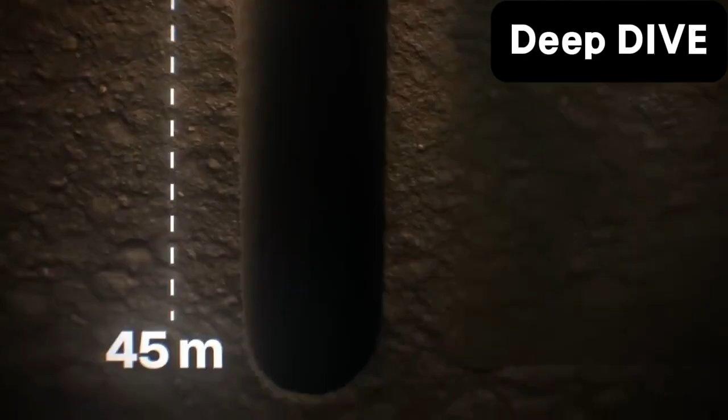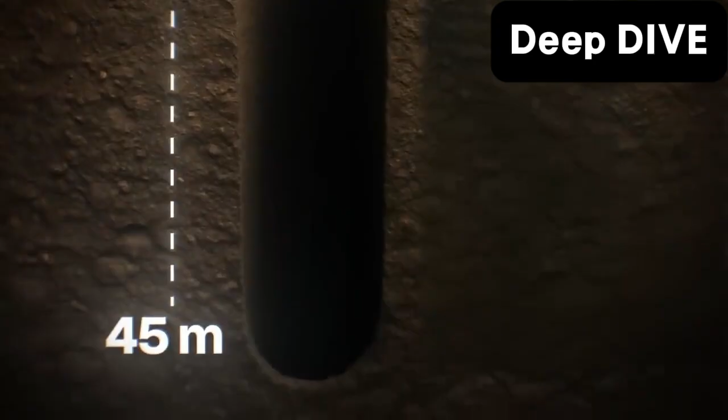It's evident that if Dubai wants to claim the title of the deepest pool, they will need to increase its depth from 45 meters to 60 meters. However, this task is much more challenging than it sounds. Experts calculated that if the pool's depth is increased to 60 meters, the groundwater pressure would easily push up.

When we mention them, the first name that comes to mind is Dubai, which boasts 425 Guinness World Records and is the leading city in the Middle East. It feels as though this position is something that the rulers of Dubai are unwilling to relinquish under any circumstances.

An additional entry was added to this World Records library at the request of Dubai's Prince Sheikh Hamdan bin Mohammed bin Rashid Al Maktoum. Today, it is known as Deep Dive Dubai. It is not just a pool, rather it is a bizarre and extraordinary world. This pool has a theme of a submerged city where divers get to experience something unique.

Something unique, which was tough to even consider. In order to maintain the cleanliness of the pool water, a system has been created with NASA's assistance that purifies 14 million liters every 6 hours. Regardless of whether the outside temperature is 50 degrees Celsius or 20 degrees, the pool water is consistently kept at 30 degrees for divers' comfort.

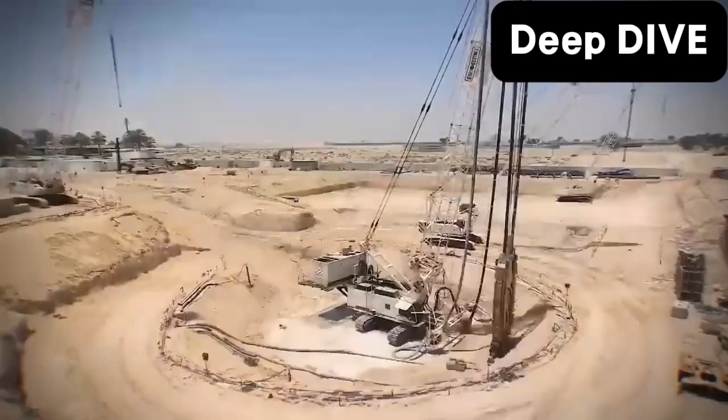We are more fascinated by the construction techniques of this deep dive than its features, as the engineering community thinks that this deepest pool in Dubai is an engineering masterpiece. During the construction of the deep dive in Dubai, engineers faced various challenges. Let's take a look at these without wasting any time.

The first hurdle was in planning and design. Sheikh Hamdan, the Crown Prince, desired a design that showcased the cultural values of Dubai. Before oil and tourism, Dubai sought to show its cultural values through pearl design, with the world's deepest diving pool inside it, with global architects and engineers involved. The simplest method proposed was to erect a sturdy building 45 meters tall and then fill it with water. This idea had a flaw.

The pool could be 45 meters deep, but to break a world record, it must not be above ground, but it should be built below. Secondly, Dubai is a very hot city. If the pool is constructed above ground in a building, the heat of the environment will affect the pool.

The Crown Prince of Dubai desired a pool that would not just be designed uniquely, but also have a depth that would be the talk of the world. Consequently, it was determined that the world's deepest diving pool would be dug underground. A shaft would be created in the ground. It will be a vertical shaft, not horizontal.

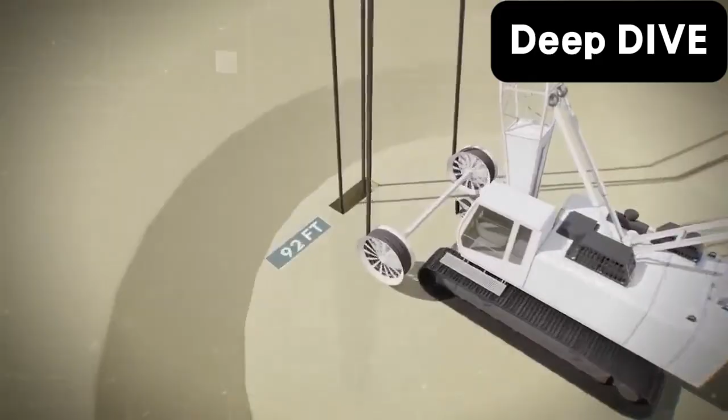This marked the beginning of a new challenge, which was excavation. The engineering team's challenge was to dig a shaft that would be 92 feet wide and 147 feet deep. Not only did they need to excavate this shaft, but they also had to construct a wall around it to prevent collapse. In engineering terms, this wall is called a diaphragm wall.

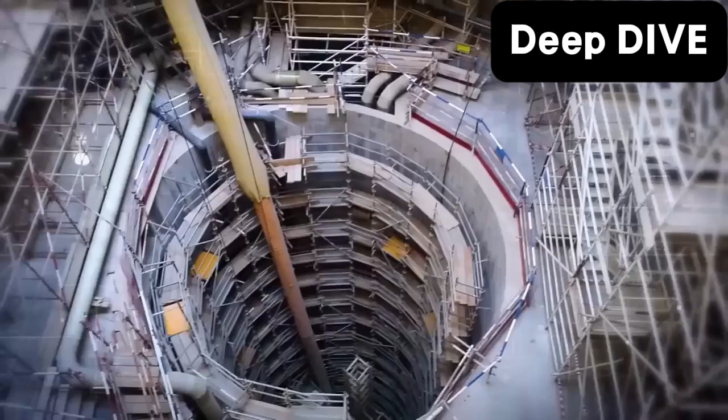To accomplish this task, a specific excavator was procured, which dug down to a depth of 147 feet, achieving a width comparable to that of a pillar. After that, a steel cage was placed inside and concrete was filled in to complete the structure. And then, in the same manner, the entire diaphragm wall was constructed in small chunks. This entire process took more than 2 months to complete.

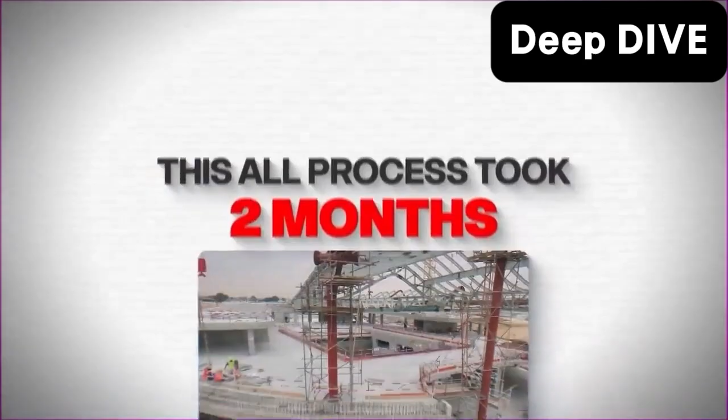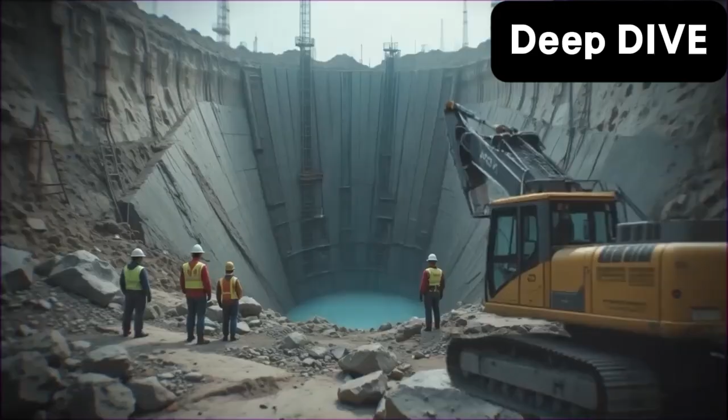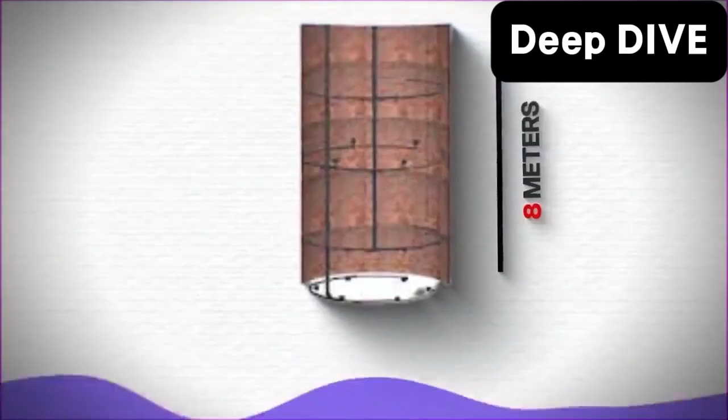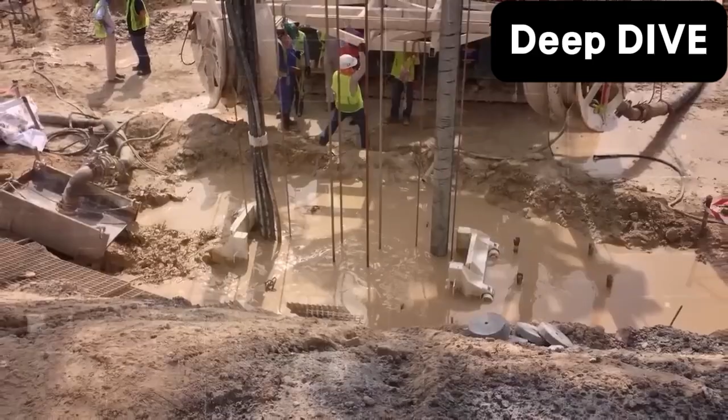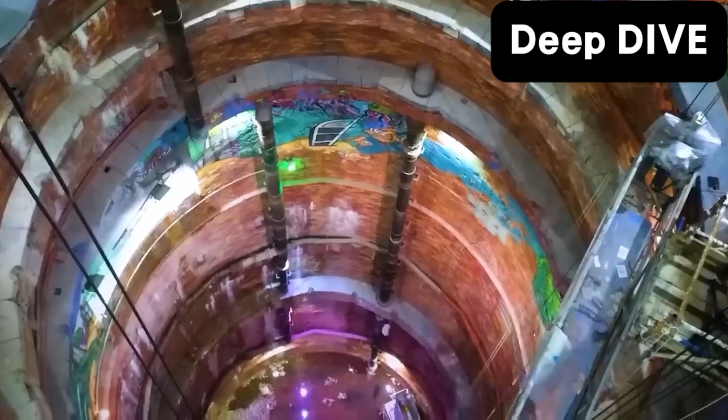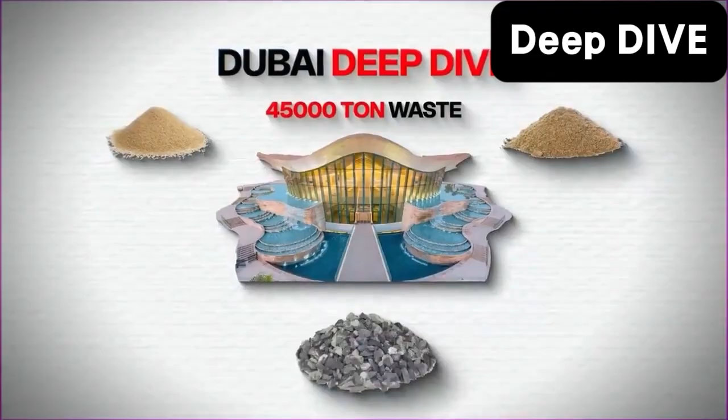45,000 tons of soil, sand, and stone debris were removed. After the pumps were turned off, water began to fill the tunnel again. It was necessary to waterproof the diaphragm wall first. The diaphragm wall was waterproofed over the next few months, and only after that were the pumps stopped. Total waterproofing was done for the diaphragm wall, tunnel excavation, and to prevent groundwater.

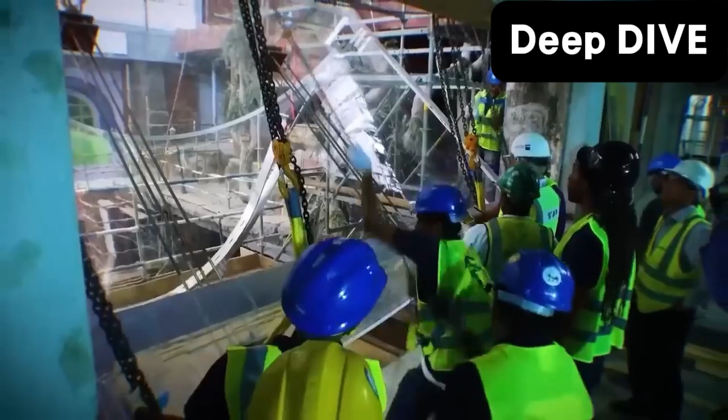It took more than 3 years. The engineering team was already delayed. Every day counted, but during this period, a new issue emerged in the construction of Deep Dive. The design was altered. Once the diaphragm wall was ready, excavation was also completed and groundwater was managed. At that moment, news came that a deep diving pool named Deep Spot had opened near Warsaw, Poland, with a depth of 45 meters, which is about 147 feet.

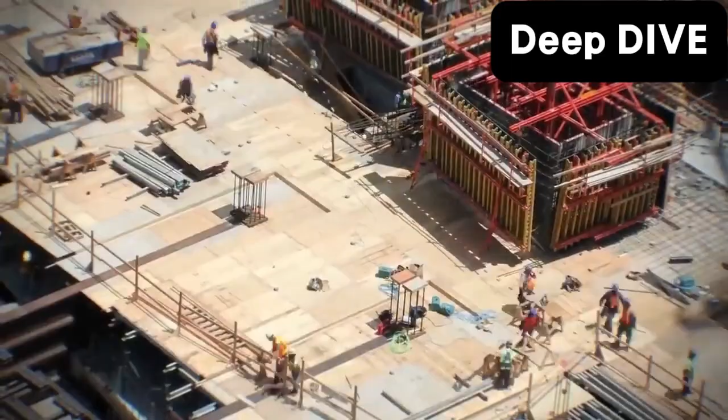This news struck the entire Deep Dive project team like lightning because all their hard work was aimed at setting a world record. In general, most details of such projects are kept secret, and this was the case here as well. Upon learning of this, the Crown Prince of Dubai demanded that the depth of Deep Dive be raised even more, so it would still be possible to set a world record with ease. However, there was a problem here.

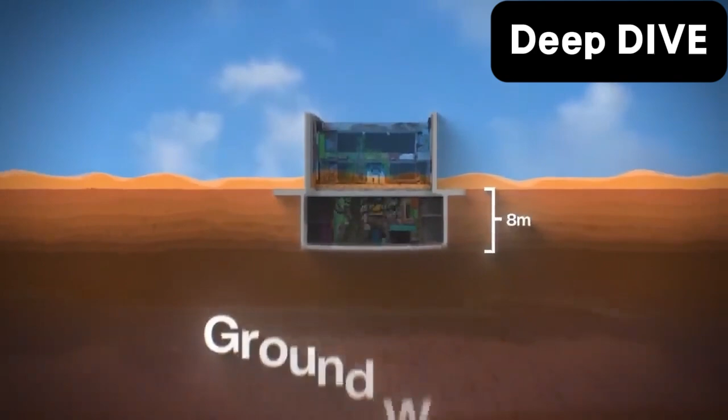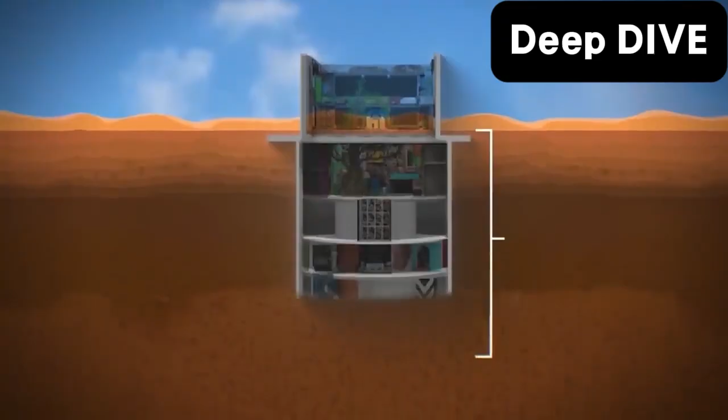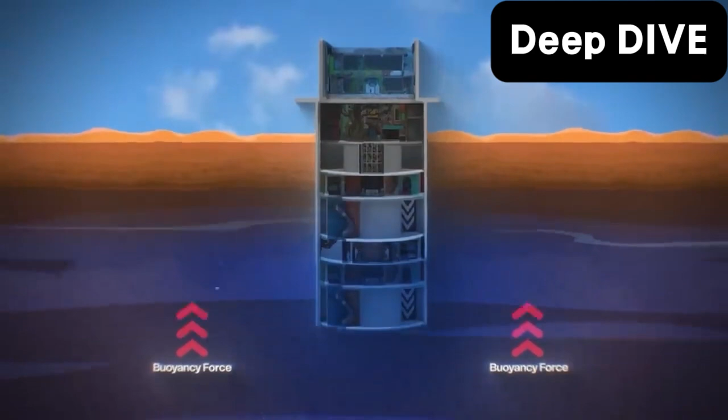However, if the depth of the pool were to be increased by another 15 meters, it is clear that the buoyant force would also increase significantly, and it is possible that the pool could completely float out of the ground with the diaphragm wall. As a result of this issue, all construction work was halted. Finding a solution as soon as possible was very important. After much research, a solution was identified.

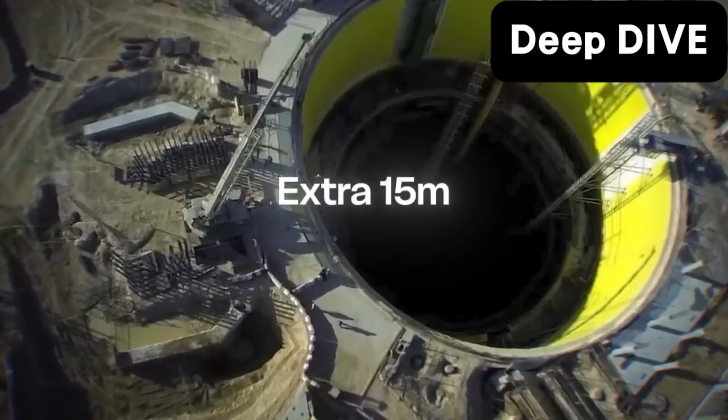In this way, the depth of the Deep Dive has been extended from 45 meters to 60 meters, and the entire project has once again become eligible for the Guinness Book. The issues are still unresolved. As days went by, it was becoming risky to keep the 60-meter tunnel dry, because cancelling the buoyancy force is only possible with the water present inside the pool. If this structure is left unfilled for an extended period, it may rise completely because of groundwater pressure.

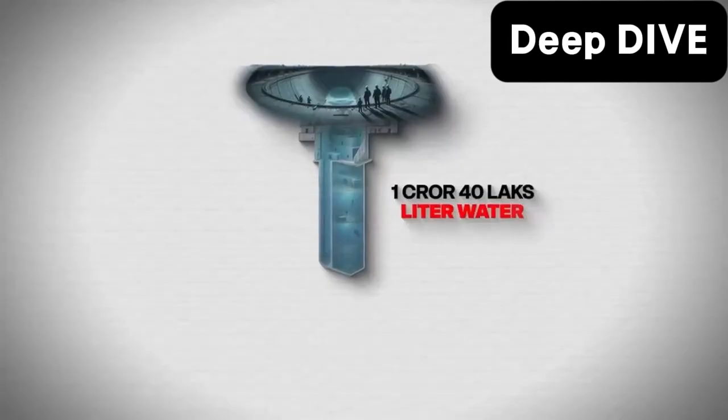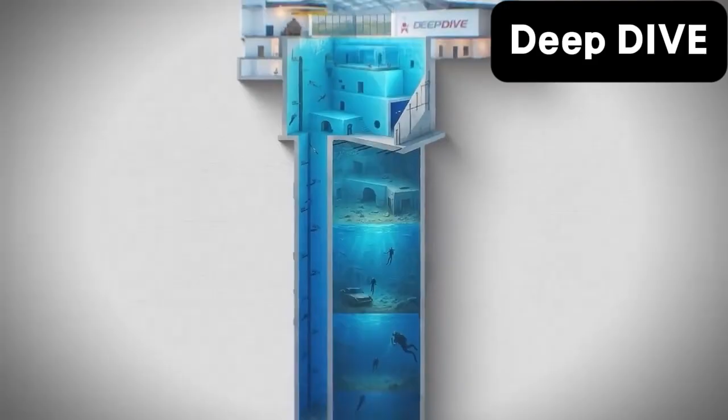The challenge was that the Dubai Water Supply Authority could only supply a limited quantity of water, which was insufficient for filling the required 1.40 crore liters. If filled at this rate, it could take 3 months to fill the pool completely. In order to meet the deadline and complete this work quickly, over 100 water tankers were brought in addition to the supply from the Dubai Water Authority. You can understand the immense scale of Deep Dive by realizing that it took a full month to fill the pool even with all the preparations.

Before filling the pool, a theme of a submerged city was created inside, and only then was the water added. New challenges were encountered as certain materials began to corrode and some items started to float after absorbing water. Subsequently, they took measures to address this. They created holes in those items and added extra weight to prevent them from floating.

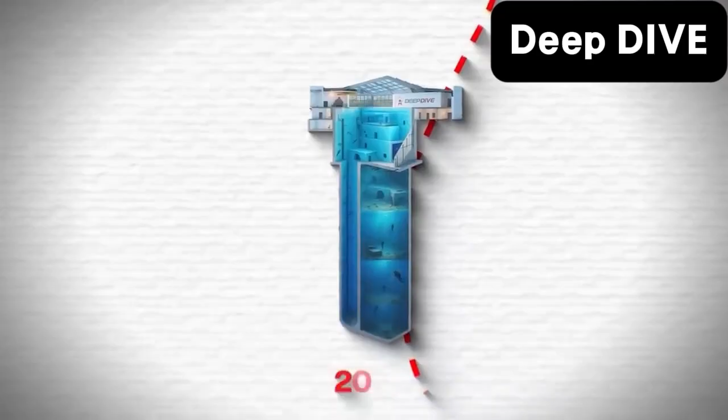After completing all the finishing touches, Deep Dive was first opened for special guests in 2021 and then for the public in 2022. The cost of Deep Dive in Dubai has been kept secret by the Dubai government so far, as they consider it a priceless project. A priceless project.